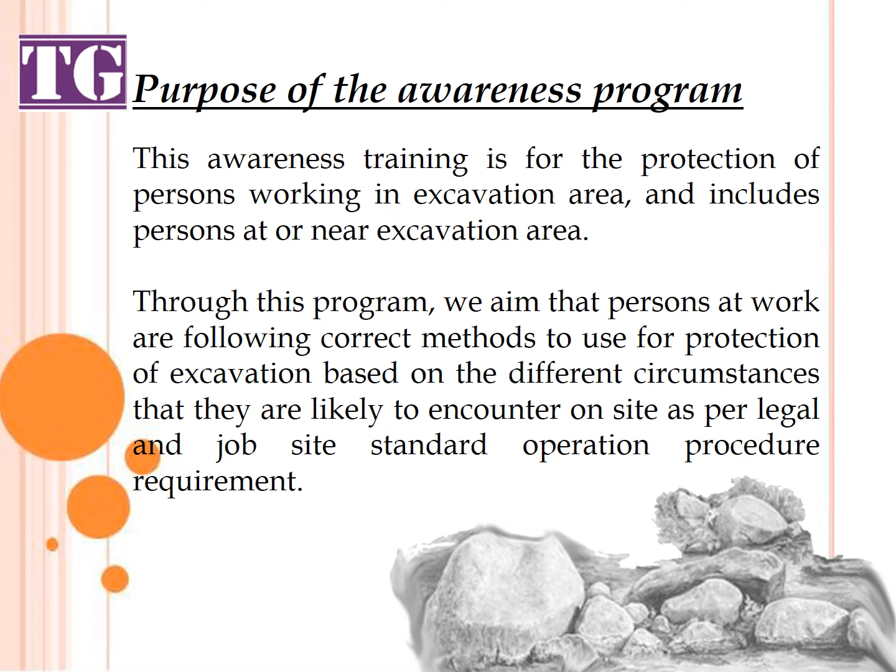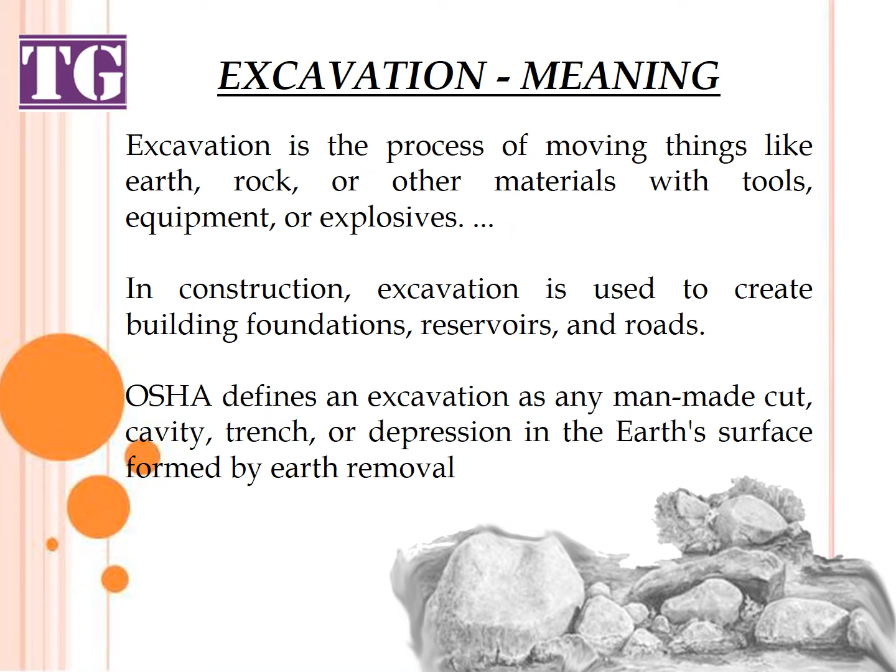Legal requirement: Workplace Safety and Health Act; Workplace Safety and Health (Construction) Regulations 2007. Excavation, meaning. Excavation is the process of moving things like earth, rock, or other materials with tools, equipment, or explosives. In construction, excavation is used to create building foundations, reservoirs, and roads. OSHA defines an excavation as any man-made cut, cavity, trench, or depression in the earth's surface formed by earth removal.

When it comes to the selection of tools and equipment for excavation, we can choose a simple hoe or modern equipment like a suction excavator. The excavation tools are to be selected as per the method approved by the client. Hazards in excavations are unavoidable to a certain extent. Cave-ins, meaning the collapse of an excavation or a trench. This is a very common excavation hazard that can cause severe injuries and often result in fatalities at a job site. Asphyxiation. Asphyxiation is caused by a lack of oxygen due to a cave-in or the nature of a confined space.

Hazardous atmospheres, due to toxic fume inhalation from underground gas pockets or even damage to underground gas pipes. Falling into excavations or trenches, especially if they are very deep. Falling objects like timber, hoe, etc. kept near the excavation. Falling loads, displacement of rocks, soil, and other materials from the excavation site edge falling on workers working at lower levels. Drowning in water accumulated due to rain, high tide, etc. Incidents involving mobile equipment like excavator, lorry loader, truck, etc. Electrocution, due to underground power lines and underground utilities such as natural gas, and explosions or fires.

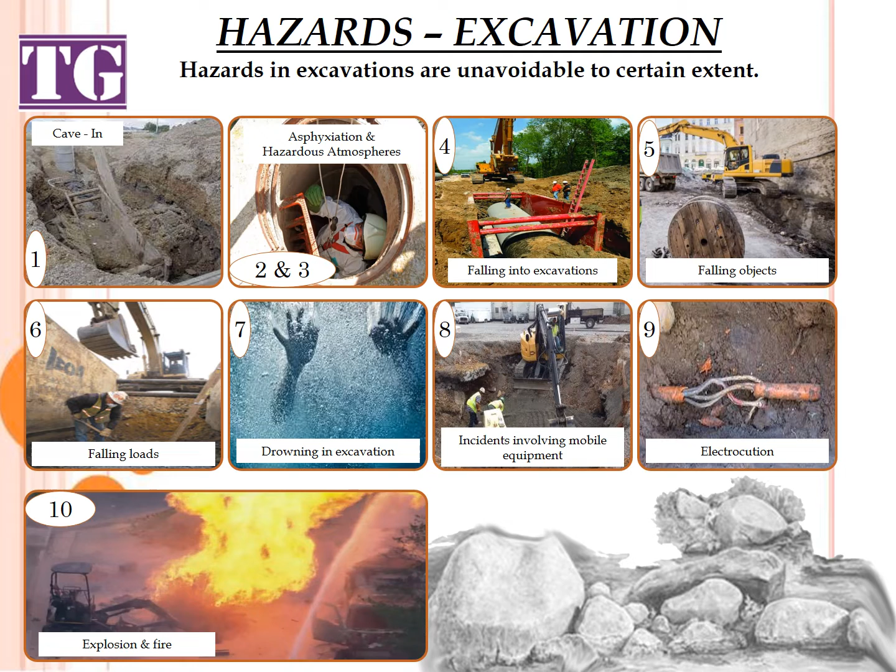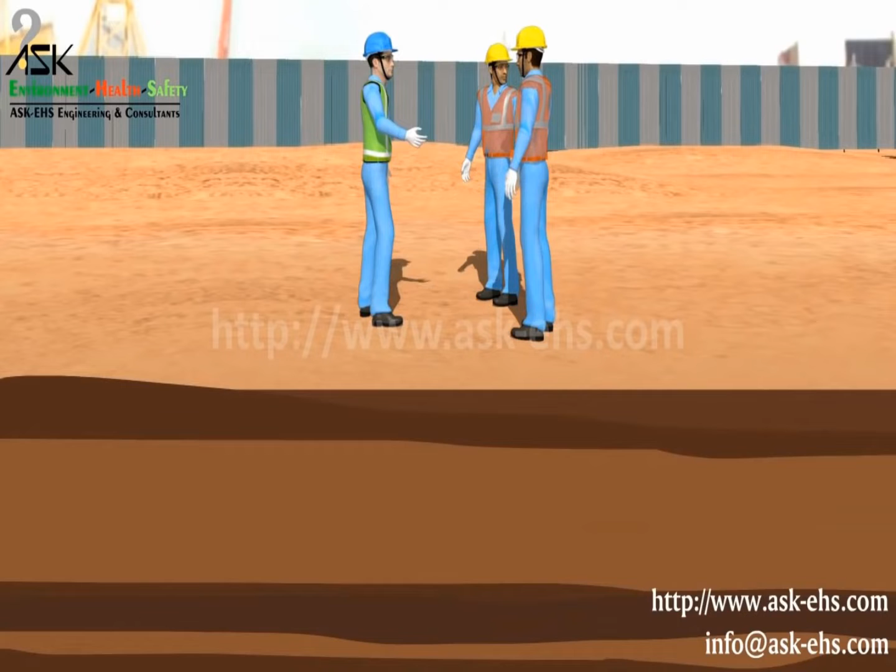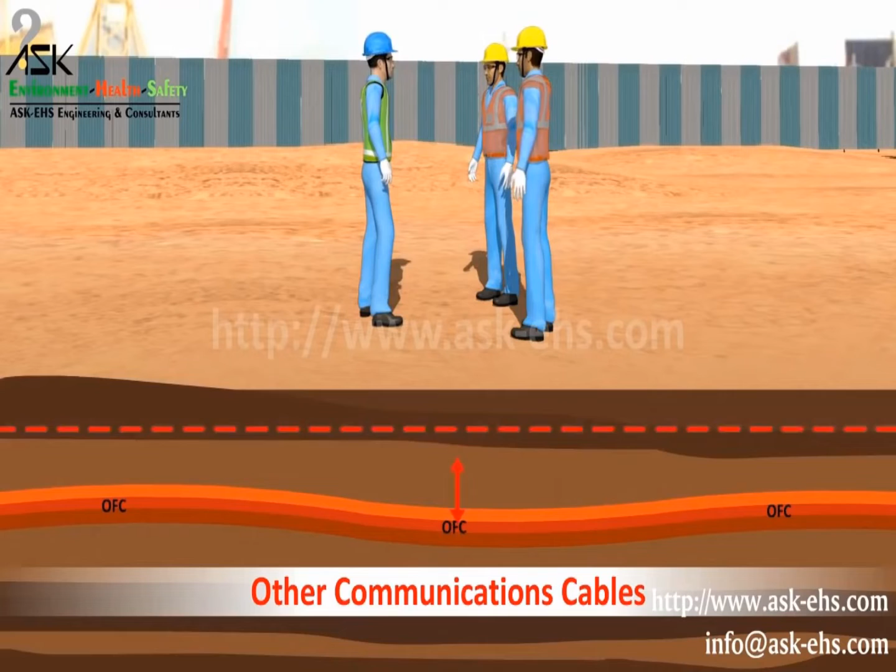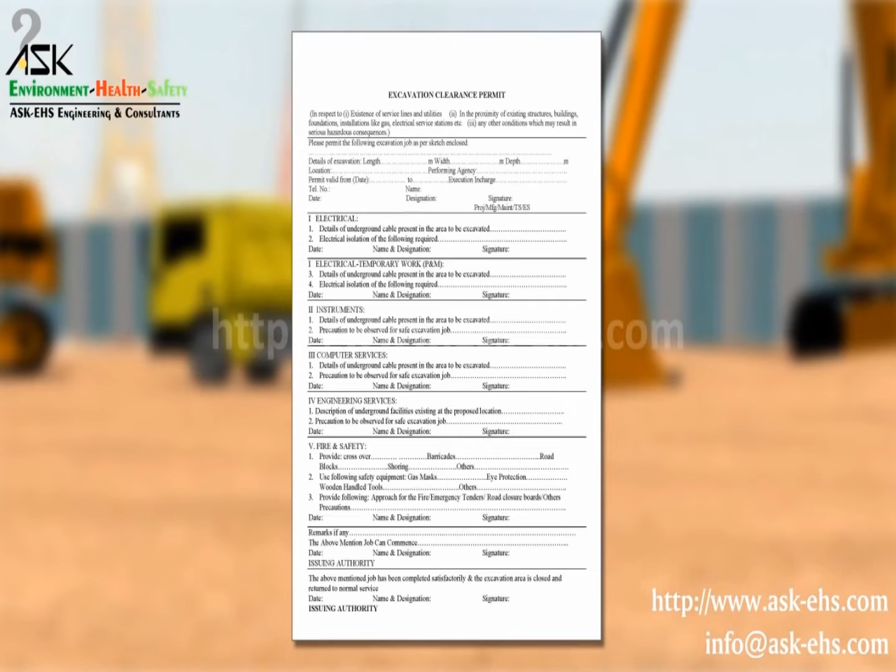Excavation works. Protection from underground utilities. We all know that several utilities may be present underground, such as electric cables, water pipelines, gas pipelines, sewage pipelines, and other communication cables. These utilities may get damaged or cause harm to us if not properly identified and isolated. Before starting any excavation, your supervisor will take a work permit for necessary areas that are to be excavated. This will ascertain the presence of underground utilities, and if they are present, that such utilities are properly isolated. This permit is given by the section in charge, and it is a clearance to start excavation and the corresponding safety precautions to be taken.

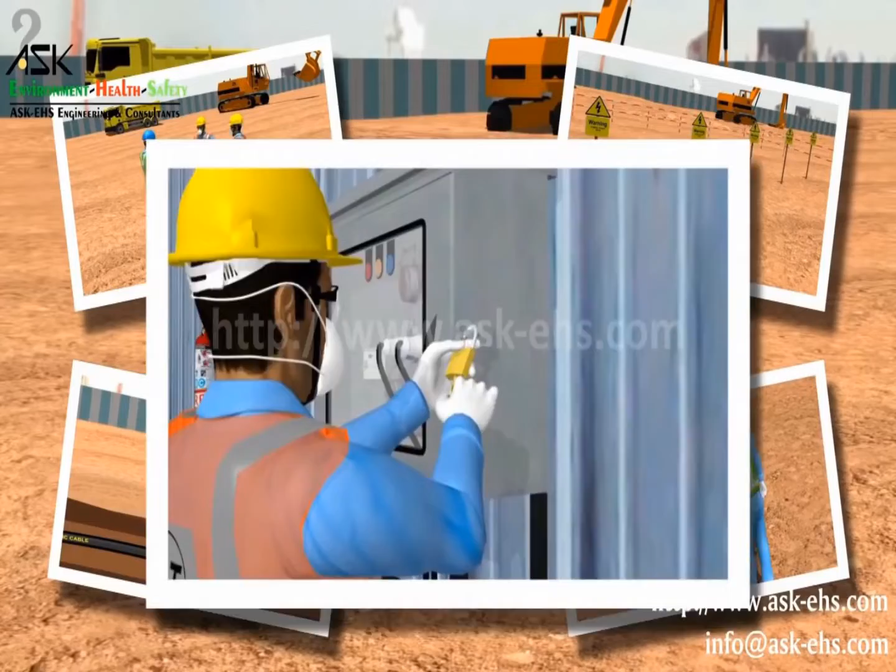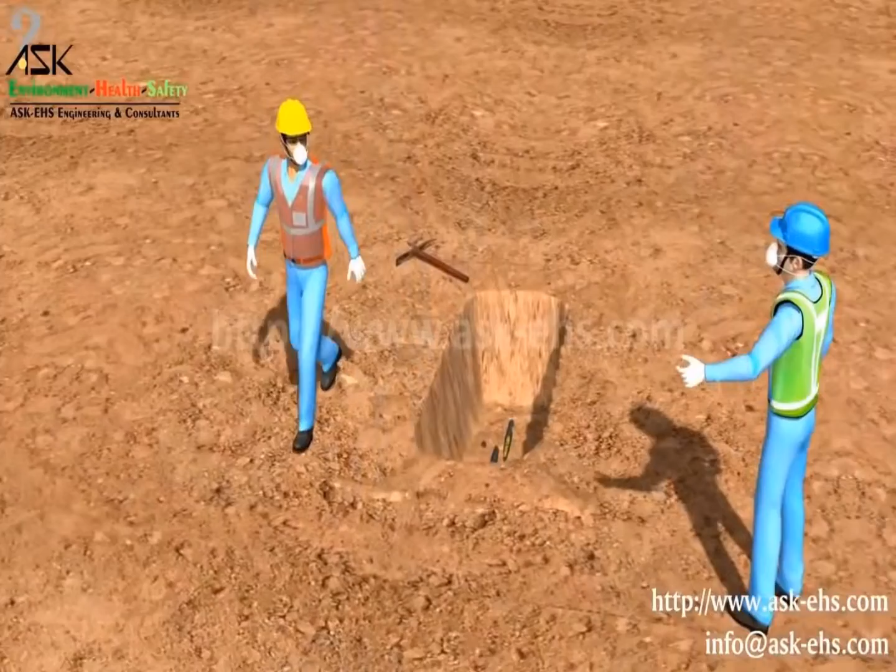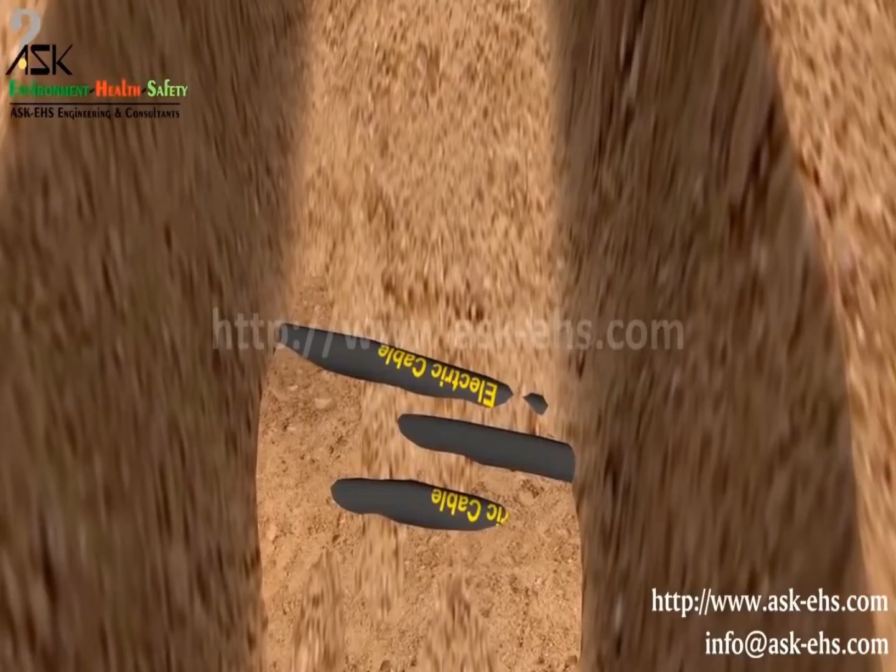Based on the work permit, your supervisor will instruct you to take one or more of the following precautions depending on site conditions. Locating underground utilities using markers and drawings. Locating utilities using advanced equipment such as a cable avoidance tool. Making trial pits to check the presence of utilities, etc. Isolating the services. Your job is to follow the instructions of the supervisor carefully while doing excavation. Do not forget to use insulated tools and tackles during excavation to prevent accidental contact with power lines. Still, if you come across any symptoms of presence of utilities, immediately stop the work and report to your supervisor.

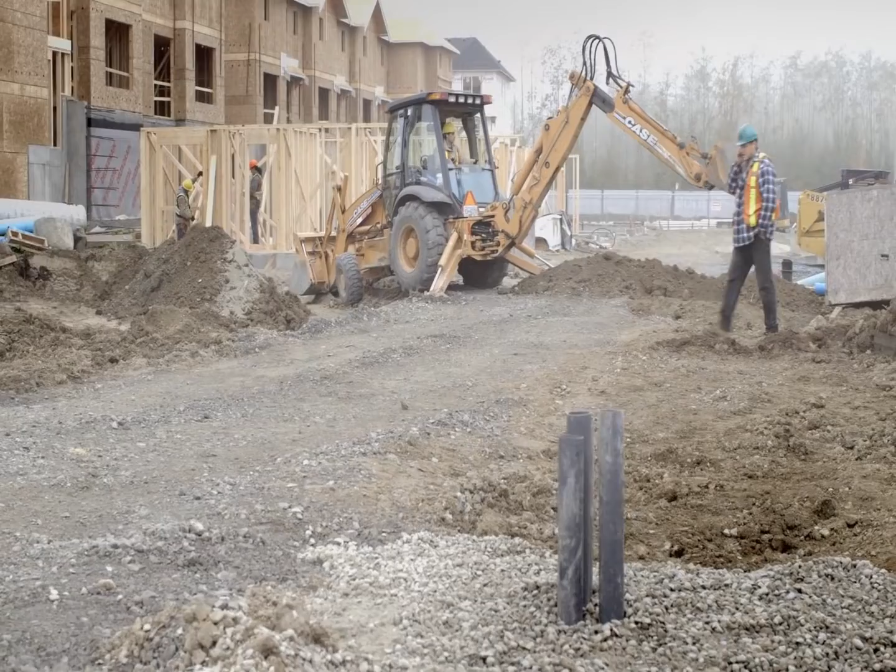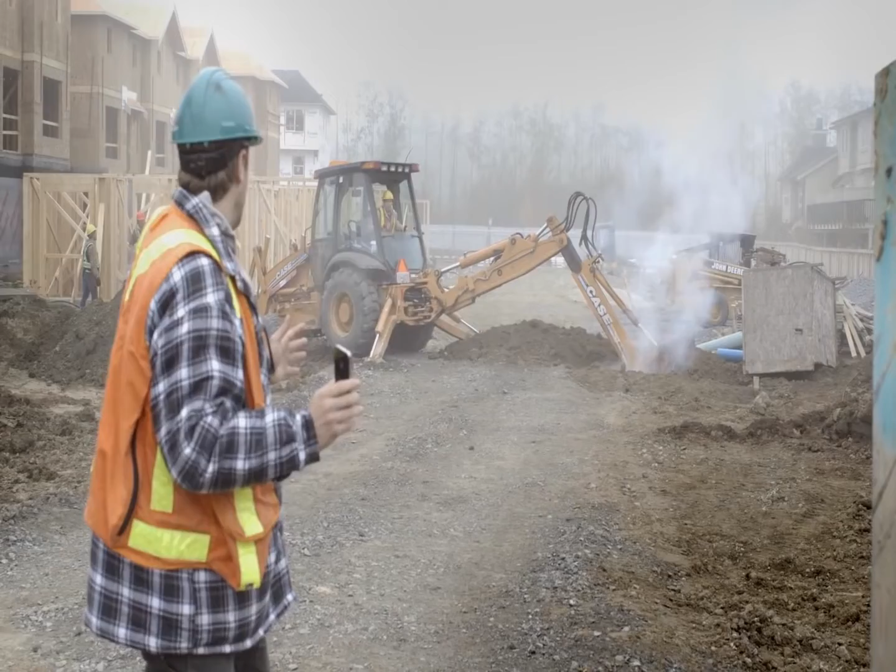No, I got concrete coming on Monday for building 4. No, on Tuesday I got drywall coming for building 6 and building 8. So I must have hit the power line. The whole area could be energized. Everybody stay back! Call the power company. I'm gonna back out the machine. Okay.

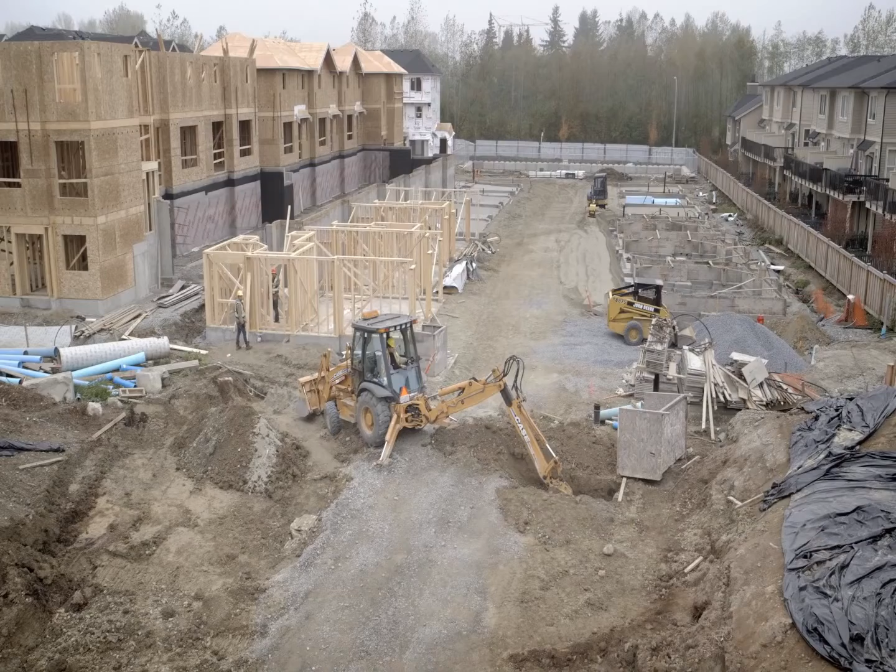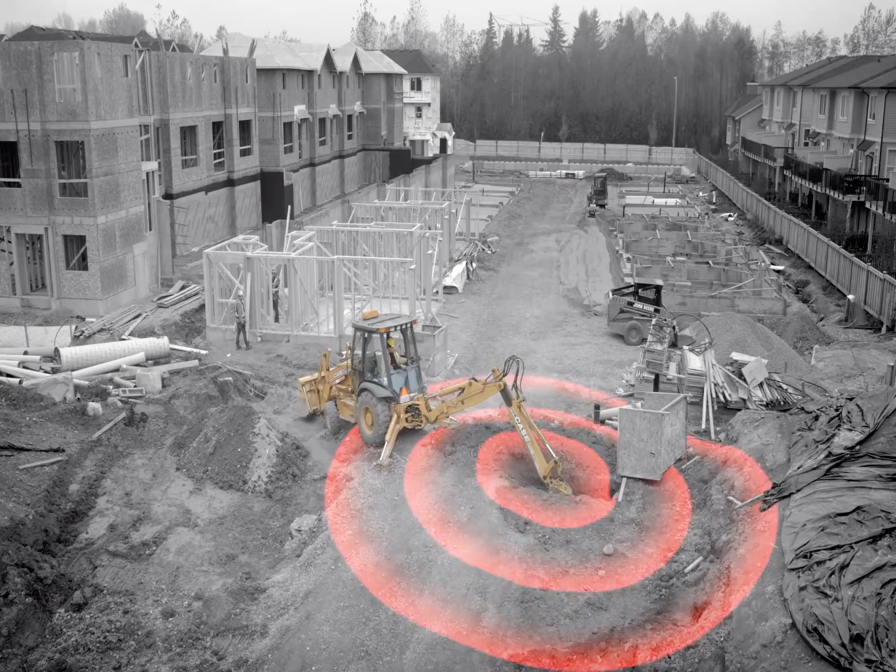Before any digging begins, always contact BC1 Call and locate all underground utilities. If the ground does become energized, the area around the point of contact for at least 10 meters will be hazardous. If you do make contact with a power line and can safely move your machine out of contact, do so.

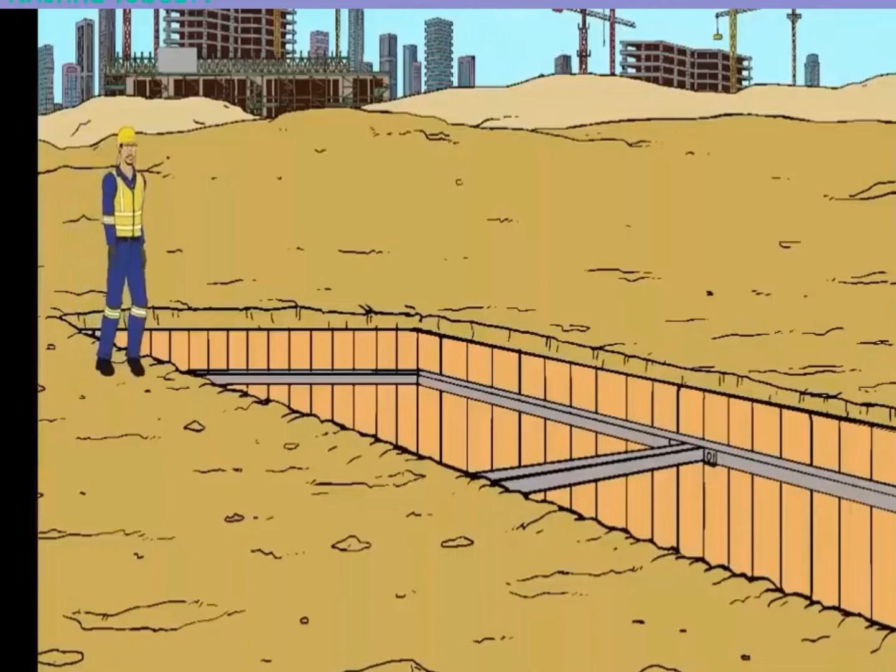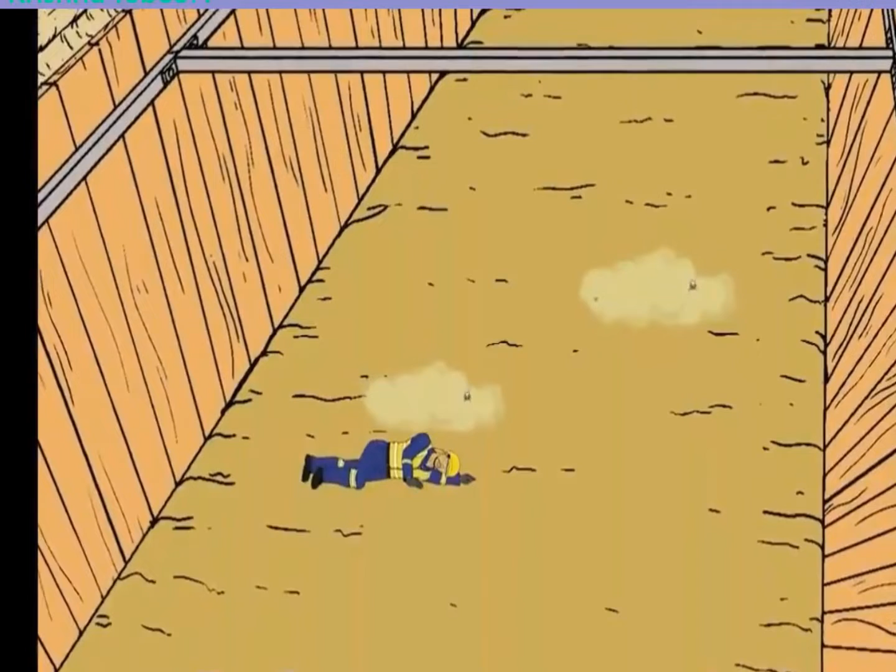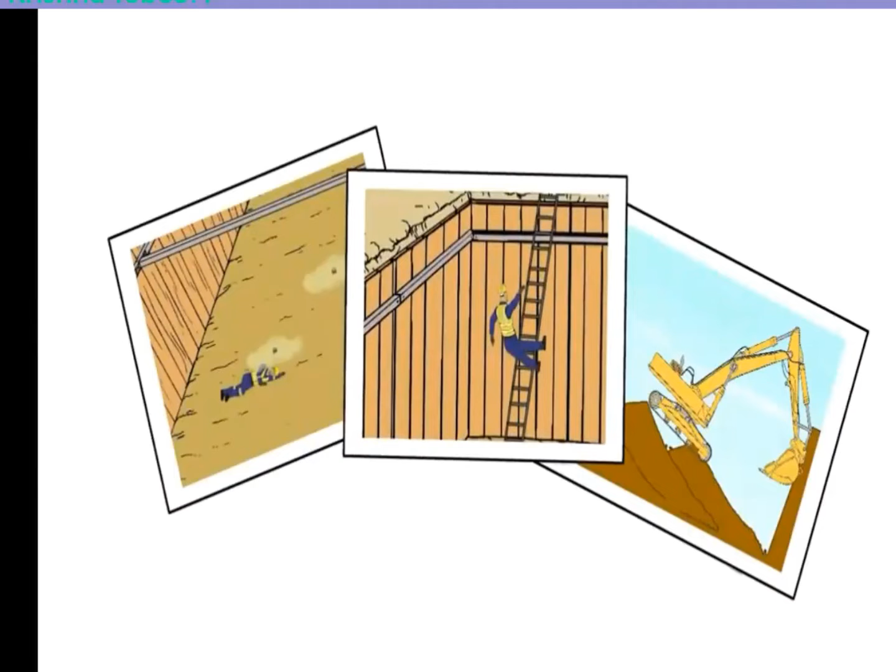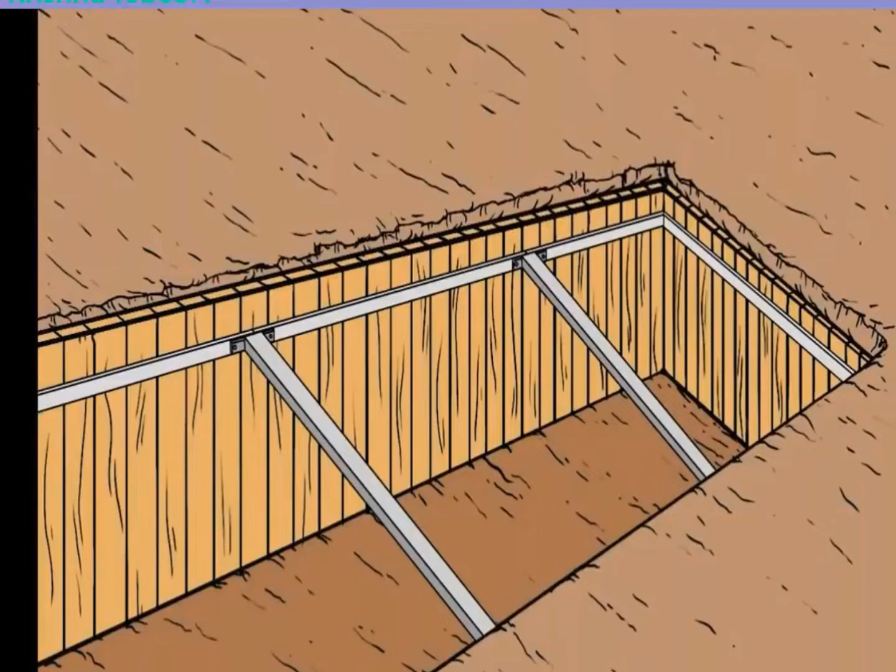Vehicles and people can fall into the excavation, and gases and water in the excavation can lead to injury or fatalities. However, work in excavations can be made safer if we follow the safety precautions. Excavations should be properly supported to prevent collapse. Employers must provide timbering, drag boxes, or shoring for excavations greater than 1.2 meters deep when there is any danger of collapse.

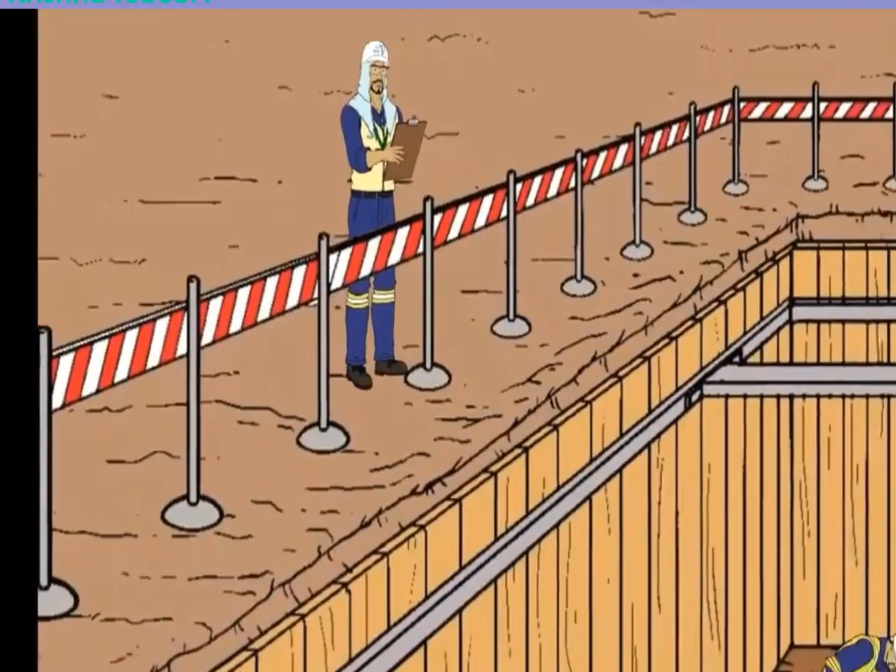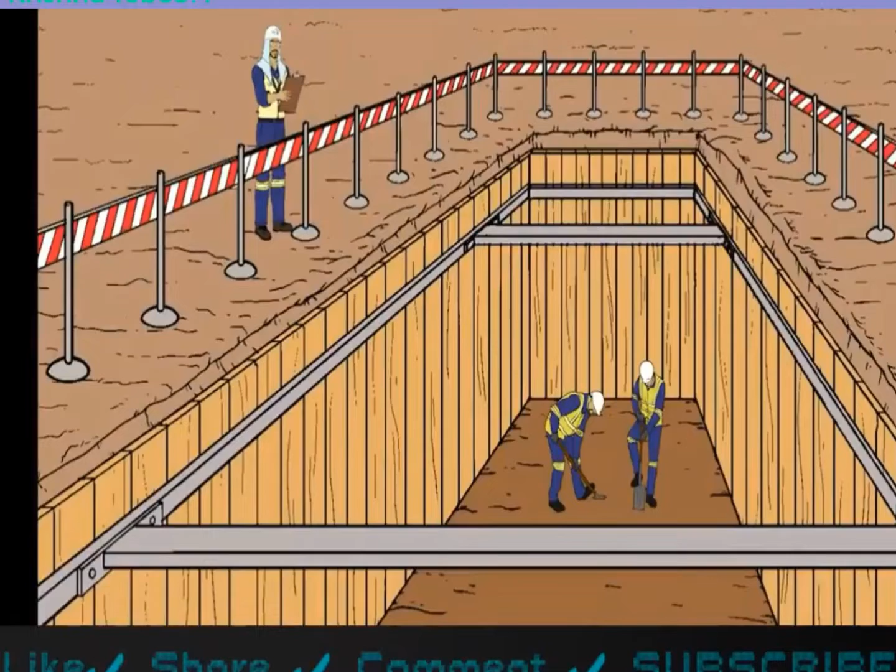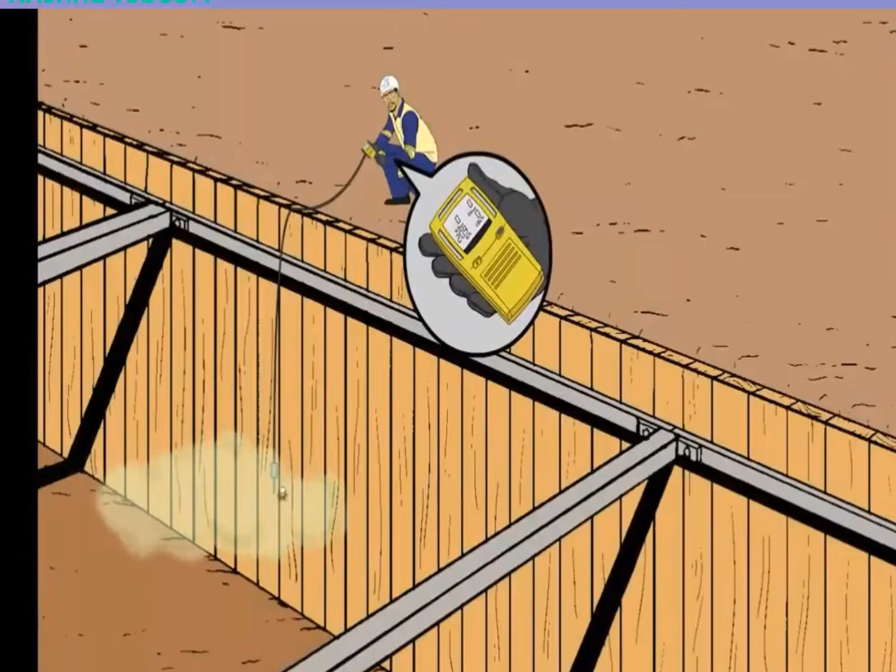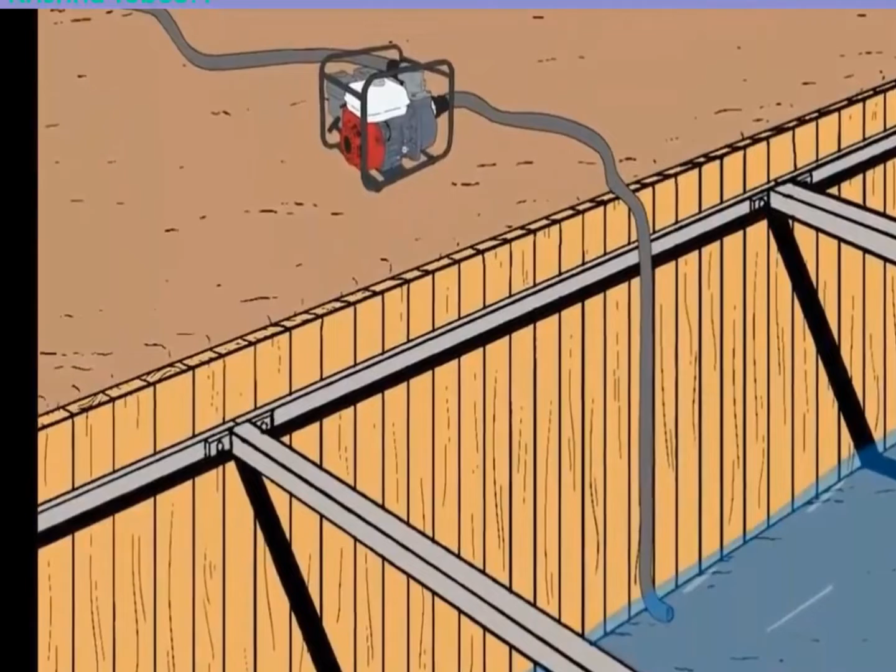Excavations and their support structures should always be inspected by an experienced and competent person before work starts to make sure they are safe. There must always be safe access and egress into and out of excavations. There must ideally be 2 ladders, no more than 25 meters apart. Adequate lighting must be provided in the excavation. Excavations should be properly ventilated. They must be kept clear of suffocating, toxic or explosive gases. If necessary, groundwater must be removed from the excavation to prevent flooding.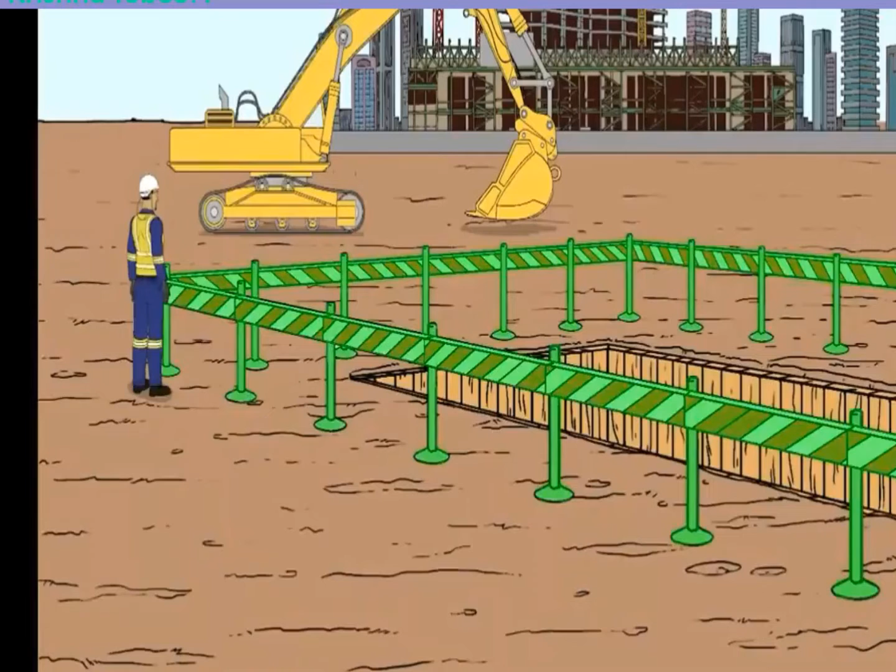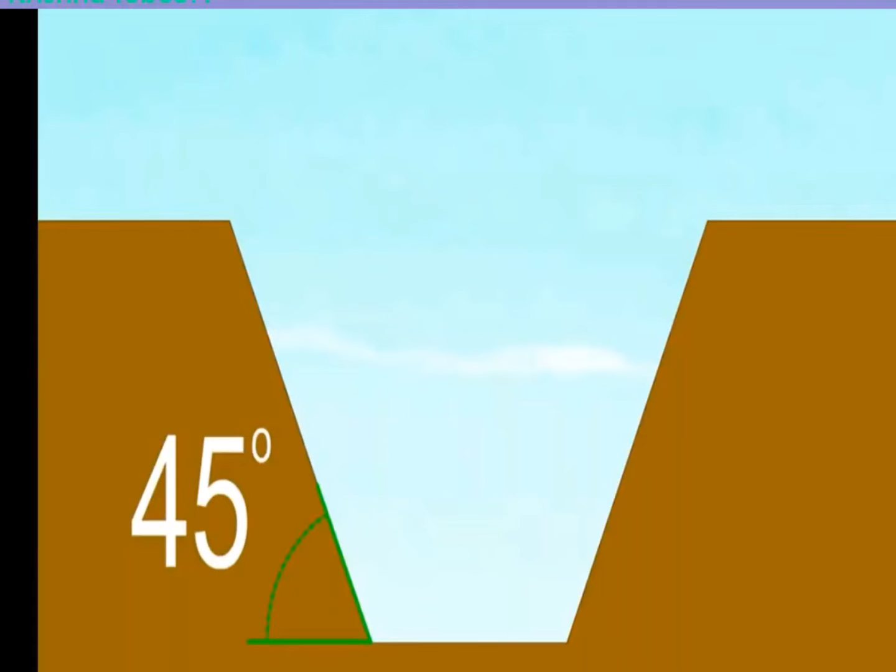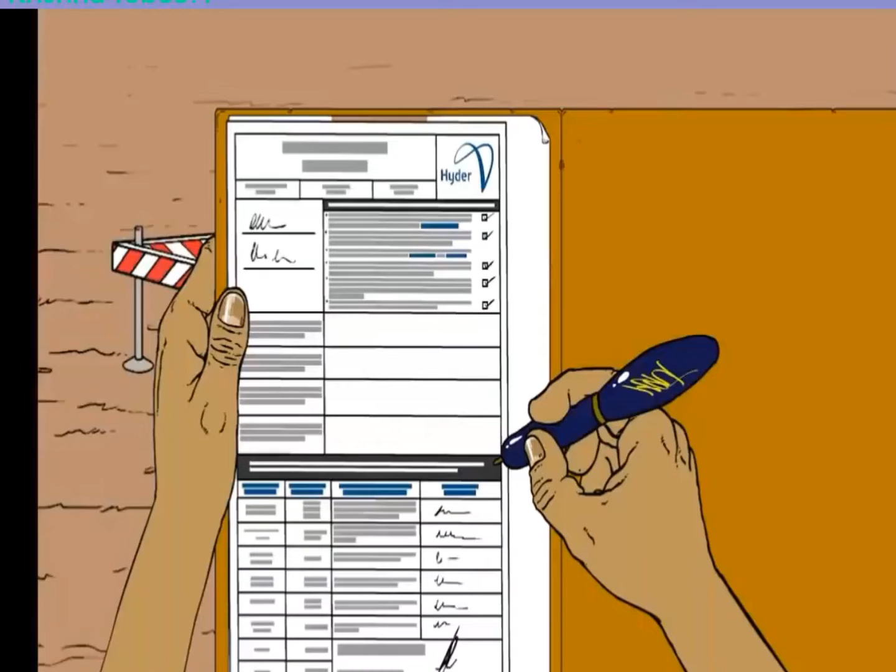Solid barriers must be put up around the excavation to keep unauthorized people, materials, or vehicles from coming too close to its edges. The angle of repose of the material is important, usually 45 degrees. This could mean that terracing the excavation is a safer option. A competent person must always supervise work being done in an excavation. Excavations must be inspected regularly, daily and weekly, and after substantial collapse or damage. The results of the inspection must be recorded. Work in excavations can be made safer if we know what the hazards are and how to prevent them.

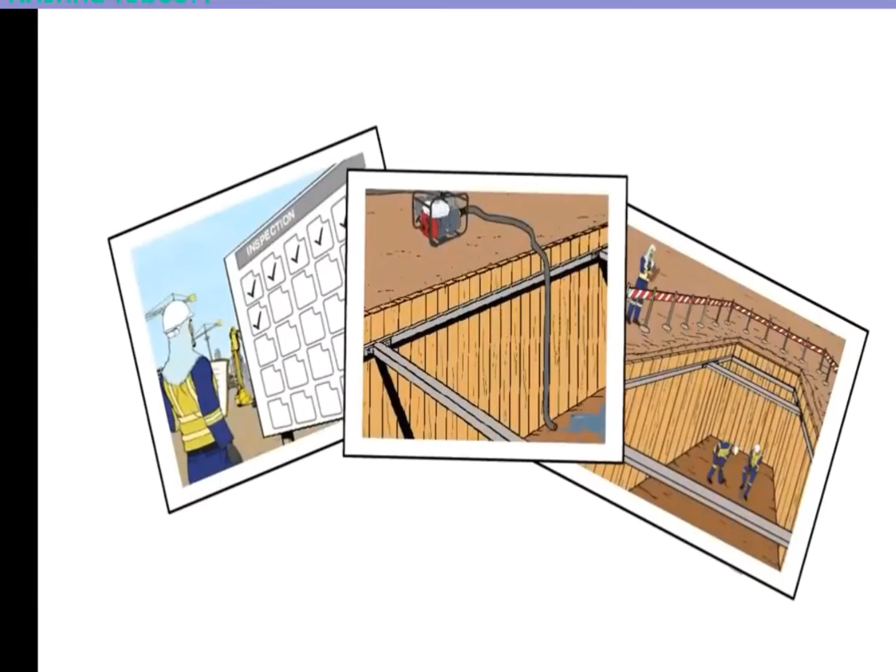Reading and understanding the WSH construction regulations will provide adequate knowledge about this program.